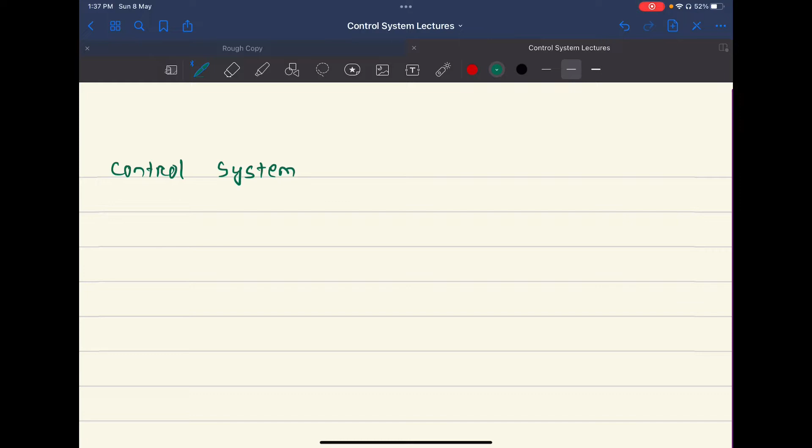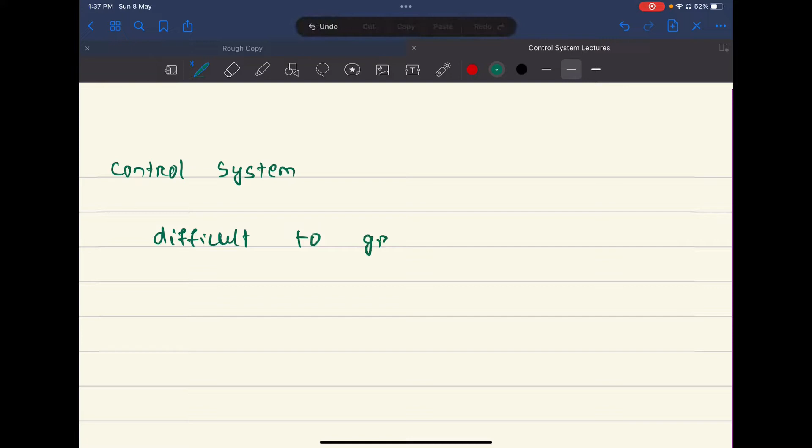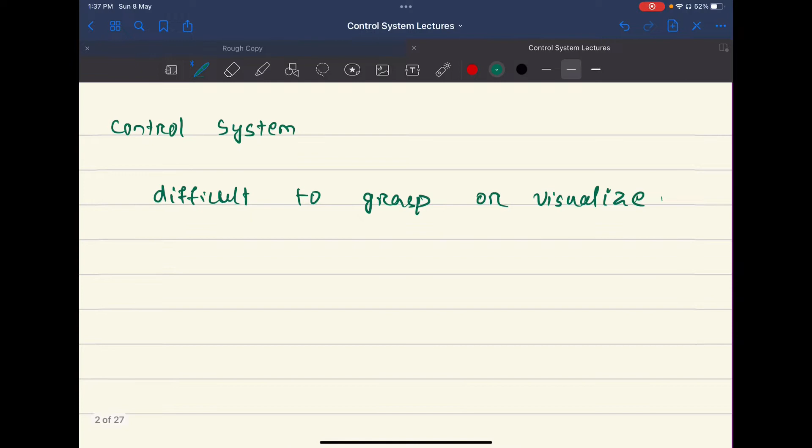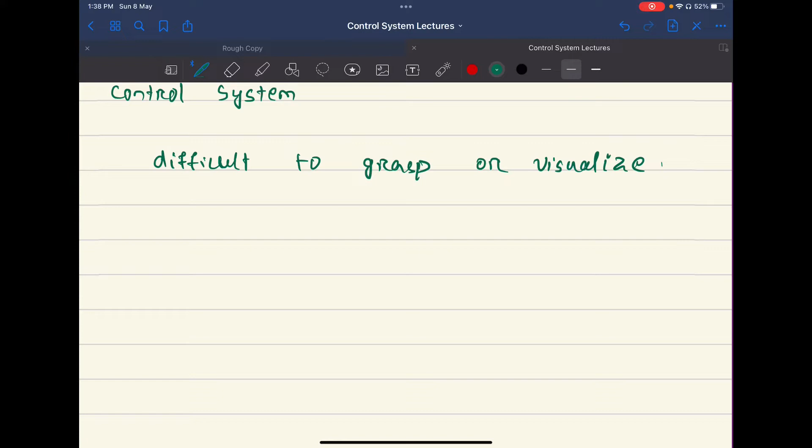The goal of this lecture series is not to solve so many mathematical problems. I will be focusing more on the topics which are difficult to grasp or difficult to visualize, so more on the qualitative aspect of the problems. As engineers, we want to solve practical problems, not some mathematical, humongous equations. To solve practical problems, we want to appreciate and understand the problem fully first, then proceed with our steps. That's why I'll be focusing more on the qualitative aspect, not the quantitative aspect. Yes, I will be doing some mathematical calculations, but not as rigorous as you find in regular classroom studies or in books.

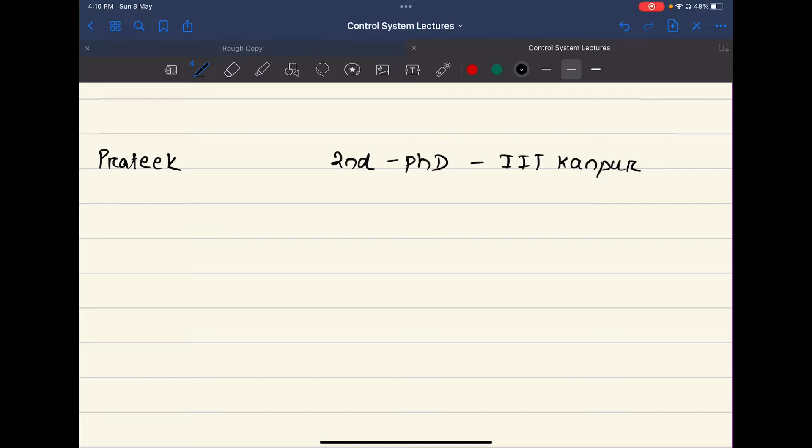My aim is to familiarize you with control system terminologies and hands-on experience on MATLAB. Through this course, I can guarantee that even if you don't know anything about MATLAB, you will be able to solve a few problems on MATLAB or write a few scripts. So I'll be extensively taking MATLAB tutorials.

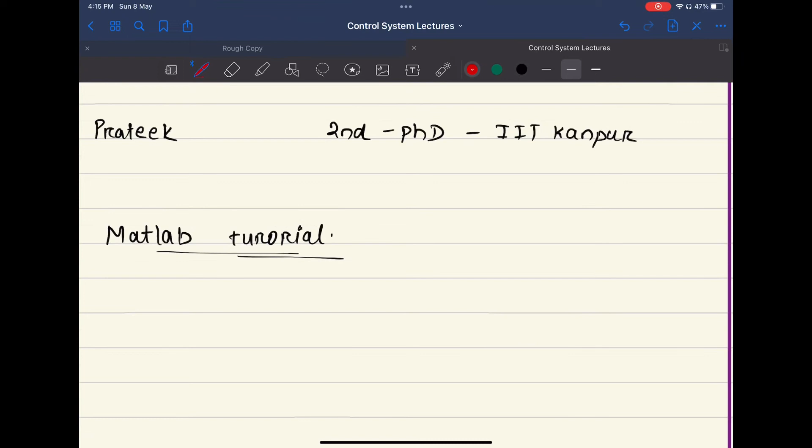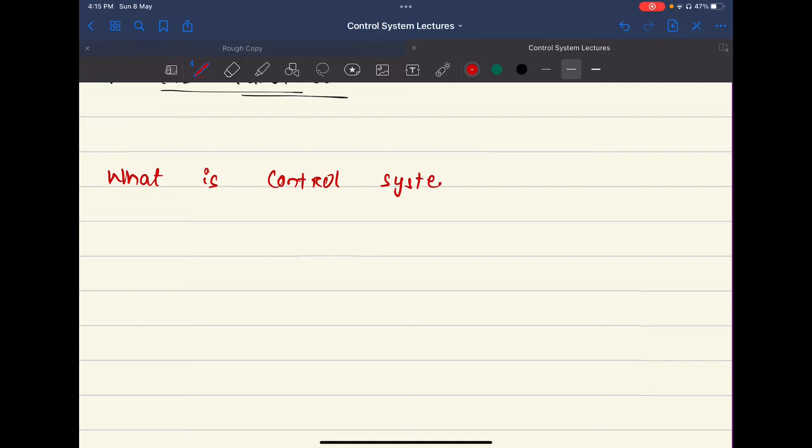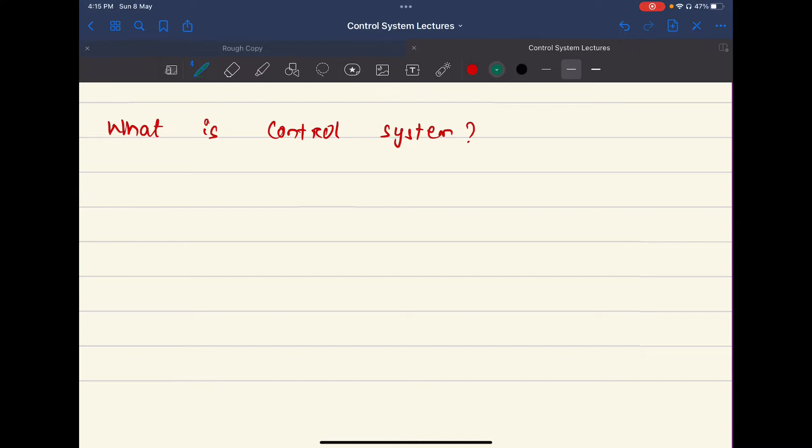Okay, so let's address the elephant in the room: what is control system? What is control system theory? Let's start with a simple example. The term control system is self-explanatory, like you want to control something. What happens when you want to control something? Let's take a random example, like if you want to control your weight, the mass of your system, to be a particular value.

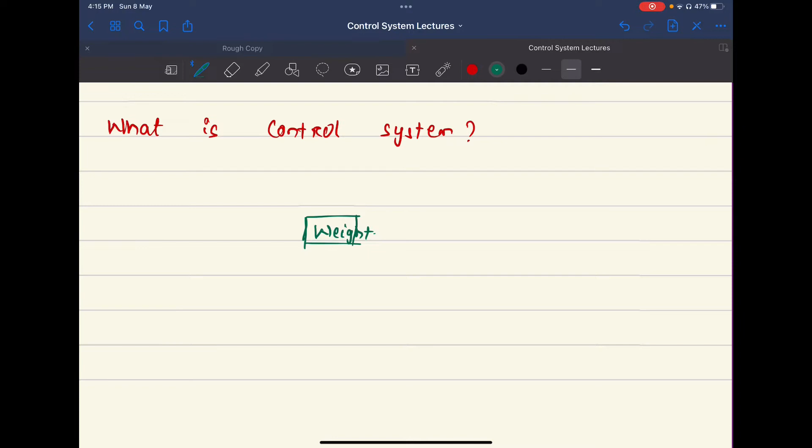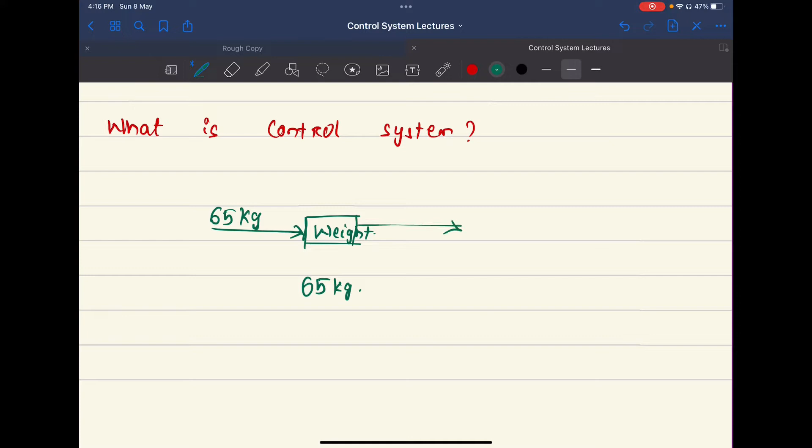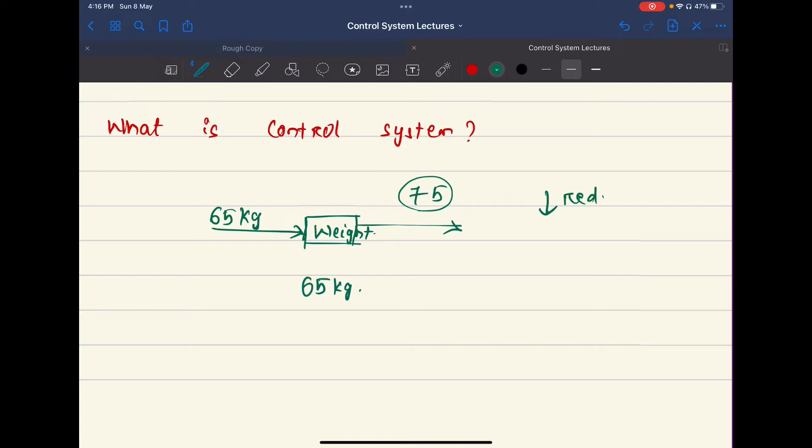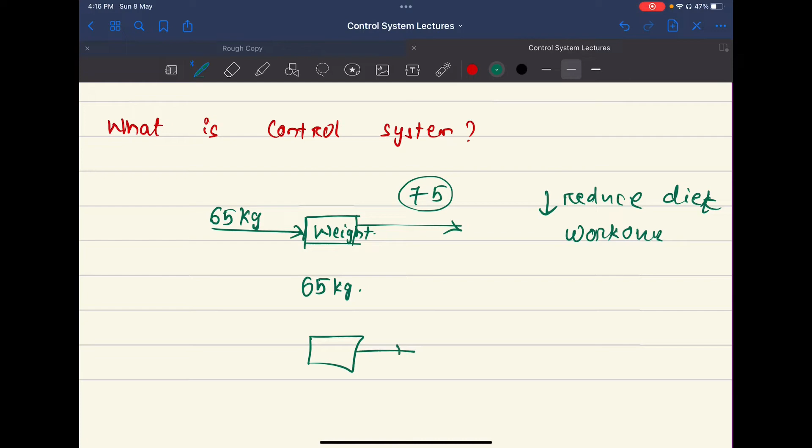Suppose you want your weight to be around 65 kgs, so you have a reference: my target is 65 kgs. But currently you have something else, suppose 75 kg. So you want your weight to be 65 kg. What will you do? You will reduce your diet and maybe exercise, do some workout. And suppose you are currently at 55, then maybe you will increase your diet and do something like that so that you'll reach 65 kgs. This is a very simple example of a control system.

You have one reference, this 65 kg, which is your target. It's called the target, or desired, or reference, and you have some actual output, actual data. This is the actual data that you have.

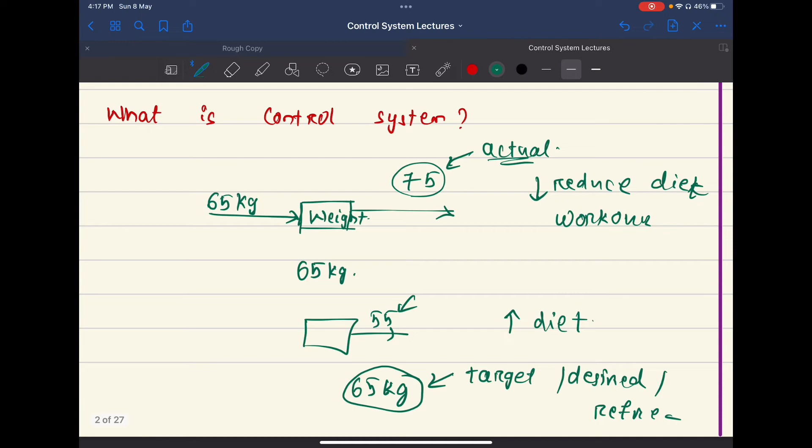So how is this concept useful to us in engineering? I must say, control system is not a specific branch or a specific engineering department. It's like a tool, just like maths. Just like maths, you can apply it to different fields of engineering, like ordinary differential equations or other maths topics; you just apply the tool. Just like that, control system glues all the departments together, I would say.

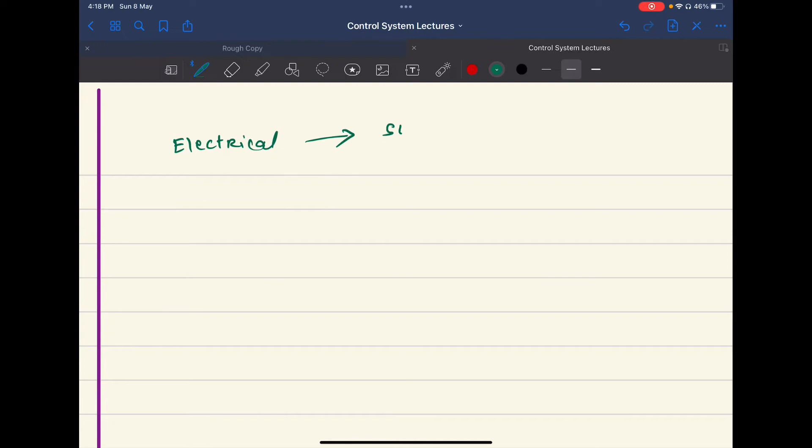If you are from an electrical engineering background, there are switches and buck-boost converters, and to increase the duty cycle and such, you need the control system. If you are from electronics and communication background, maybe you have an antenna.

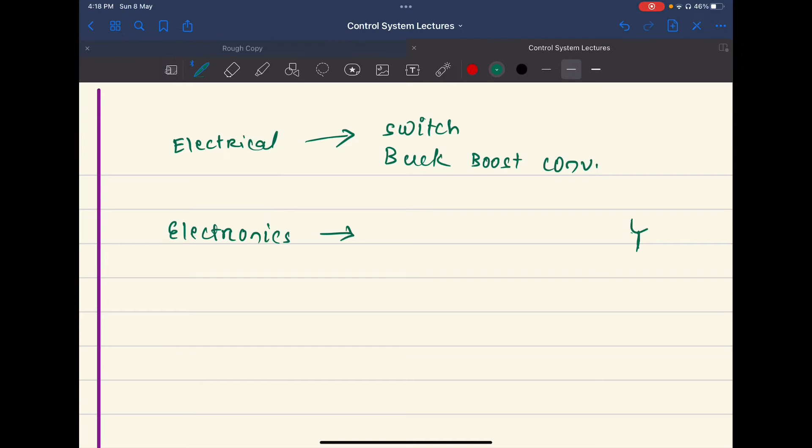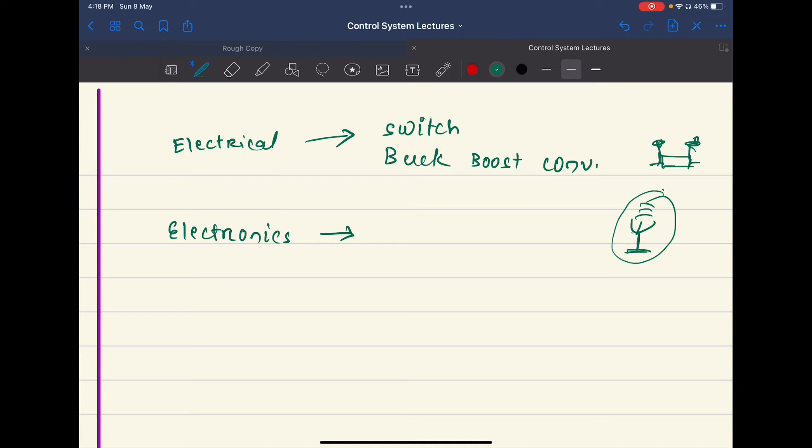Let me draw this antenna. If you have an antenna and want to track something in the sky, like a drone, or send data to that drone, you need a tracking system involving electronics and mechanical engineering. In mechanical engineering, if you have a system and need to analyze vibration and make it die out as fast as possible, control system is your way.

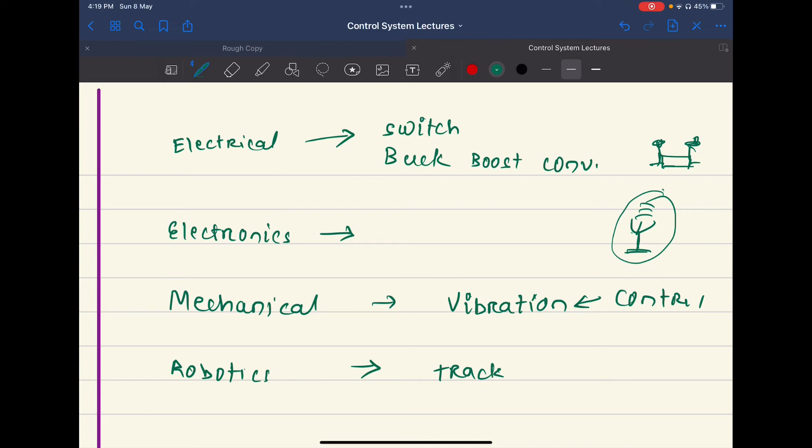In robotics also, if you want to track a path or perform some other kind of steps, then you need the control system.

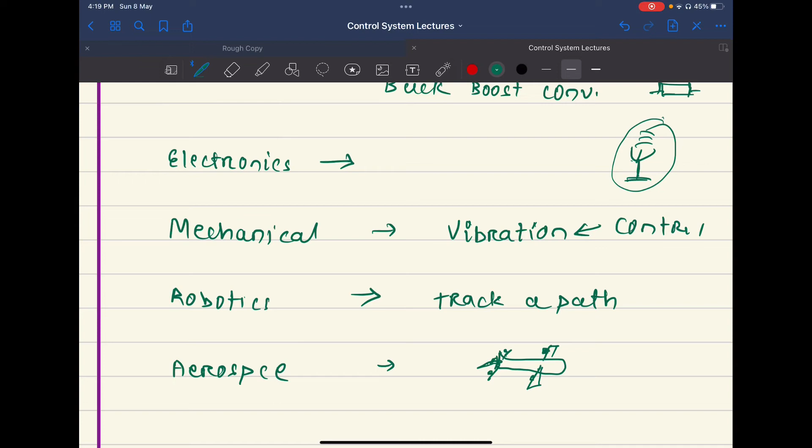In aerospace engineering, for flight dynamics and flight stability, if you have a plane like this, you have the ailerons and the rudder and everything, and you need to control the flight, so control system is useful there too.

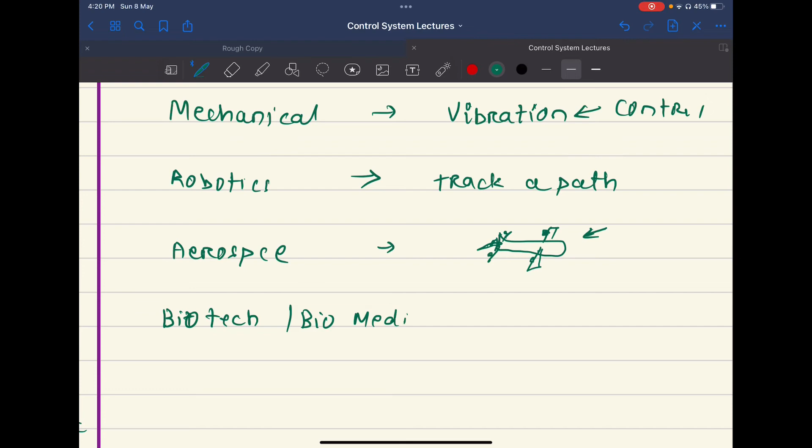So basically, control system is a field that can be applied anywhere, even in biotech and biomedical fields. Nowadays artificial pancreas techniques are being developed, where you need to maintain the glucose level, so you have to introduce control system aspects and theories there.

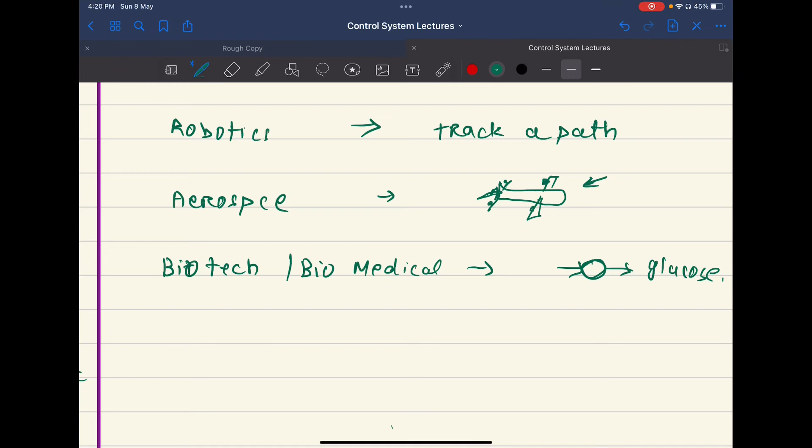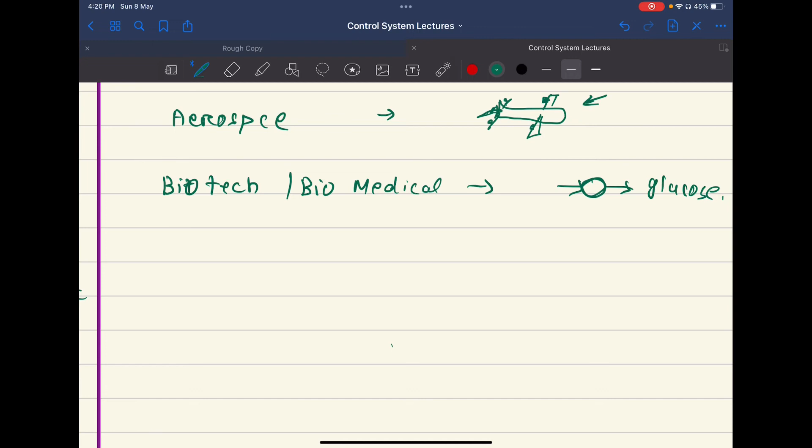So I would say control system is not a field-specific concept. It's a mathematical tool which can be applied to any field of engineering.

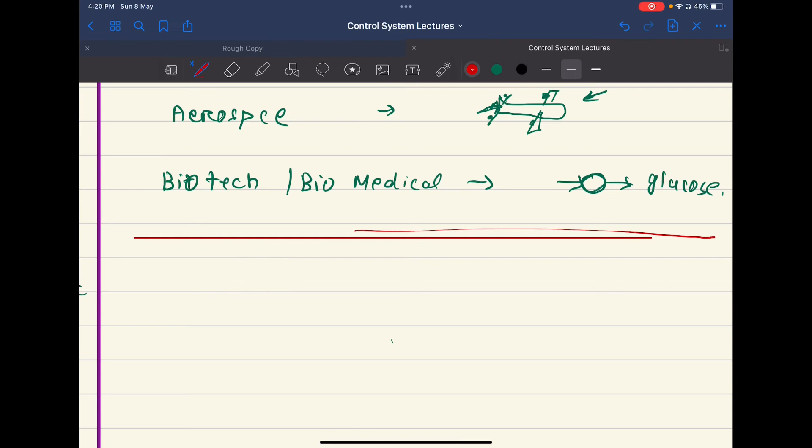So what will be my syllabus? As I have already mentioned, I would not go deep mathematically into the topics. I'll just introduce and get the qualitative aspect, using some figures, some animation, and MATLAB.

So first I would like to cover closed loop versus open loop. Don't worry if the terms are alien to you, I'll be explaining them. And then some stability related concepts.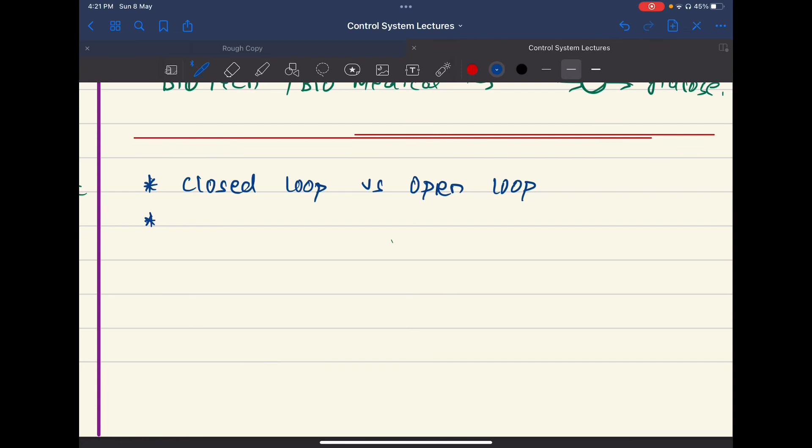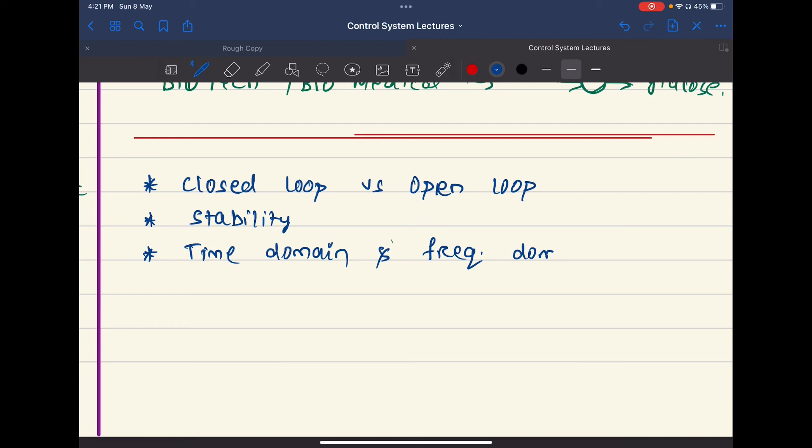Then time domain and frequency domain analysis, and why we need time domain and why we need frequency domain. If you are in college or have learned control systems, you might know the formulas from books, but why do we need them? There I will be explaining about Laplace and Fourier.

These are very beautiful concepts. If you get the feel of it, you will never forget the concept. It's that exciting.

Apart from these topics: root locus, Bode plot, and my personal favorite, Nyquist stability. These are the topics I would cover.

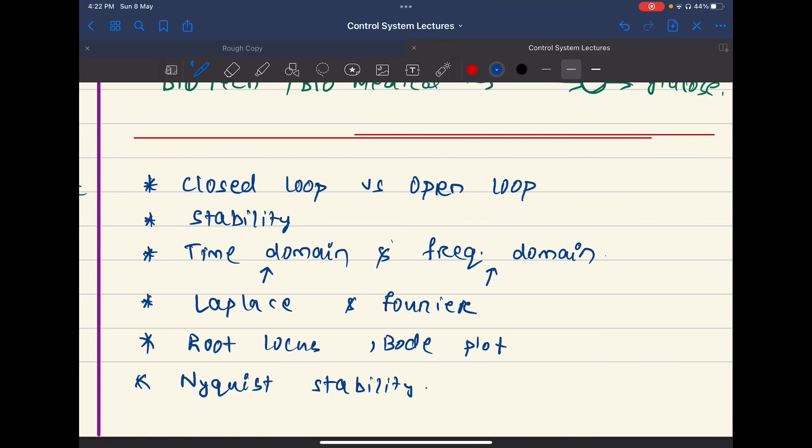Apart from this, all things related to MATLAB. This will be the overall syllabus. I'm not going in a particular order, sometimes I will be explaining mathematical background as well, like on signals and systems.

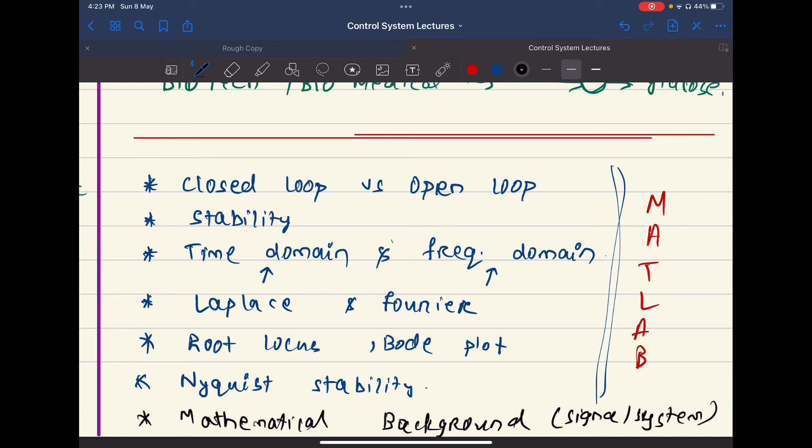I will be explaining the basics of signals and systems and the different types of input signals in the next lecture series. First I will revise those concepts. So see you in the next series.